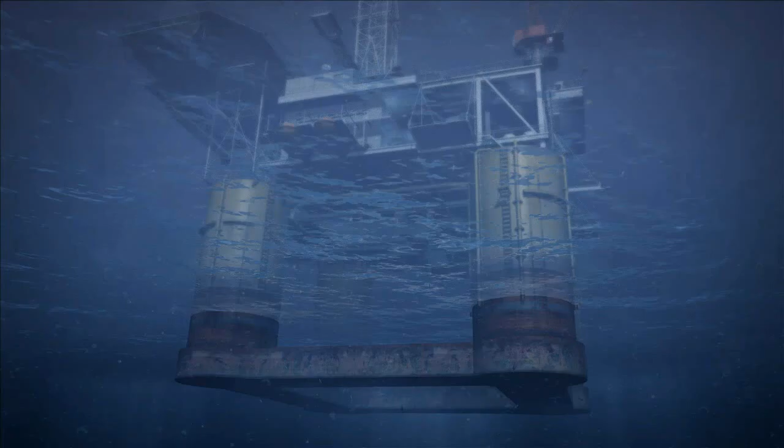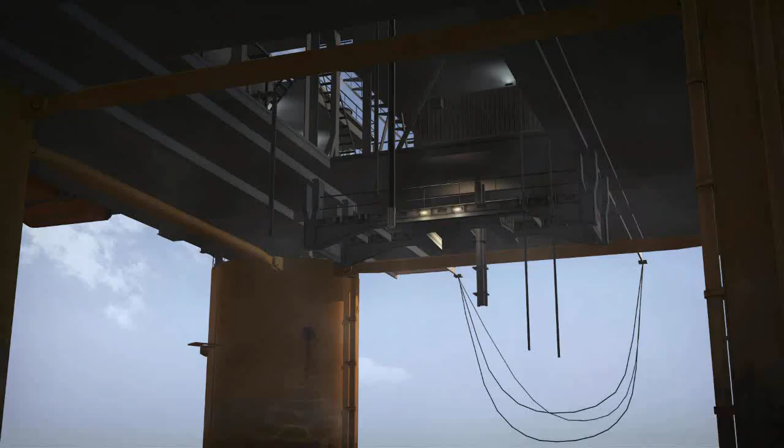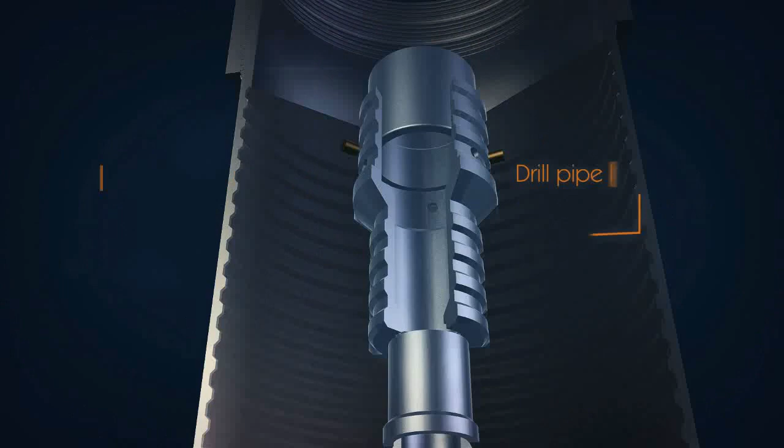At the rig floor, a casing or liner is run with a SeaCure float shoe or float collar, a standard API RP 10F Cat 3C certified double non-return valve, with wiper dart receiver and drill pipe latch-in receiver, complete with backup release shear out feature. The SeaCure assembly, complete with slip joint tool, weight set sub and latch-in adapter, is run into the casing, complete with rupture discs pre-installed.

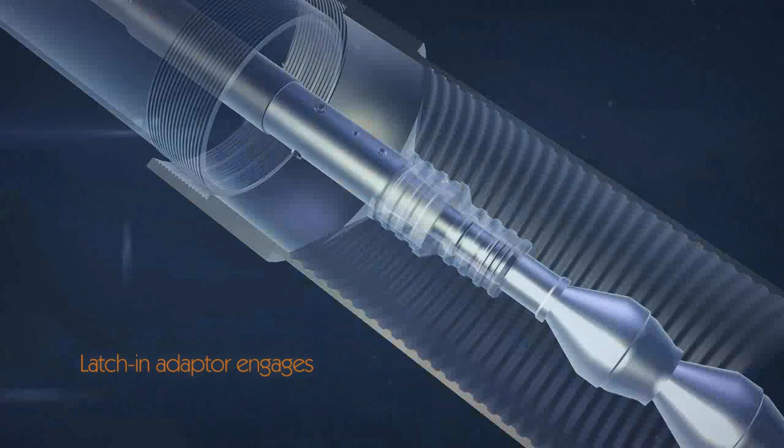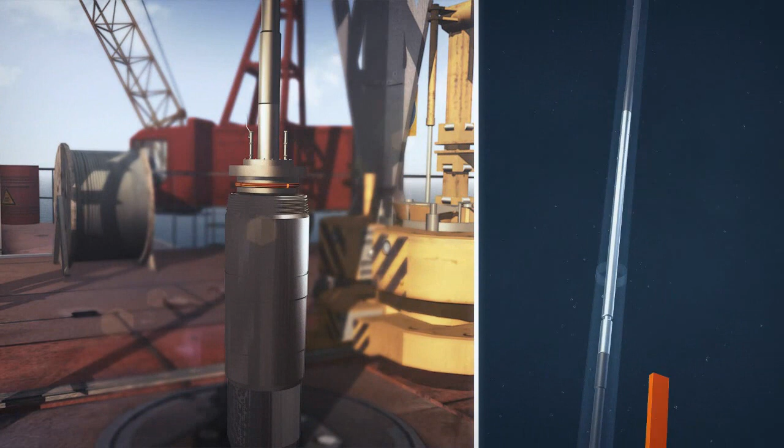The inner string is run until the conventional load-bearing running tool is made up. With the inner string in tension, the SeaCure slip joint tool is in torque-through position. The inner string is lowered until the latch-in adapter is engaged into the receiver, which is confirmed with an overpull. After the casing is top-filled at the rotary table, the running tool is stabbed into the top of the string, allowing the SeaCure slip joint tool to stroke partially closed into the free rotate position, enabling safe engagement of the running tool.

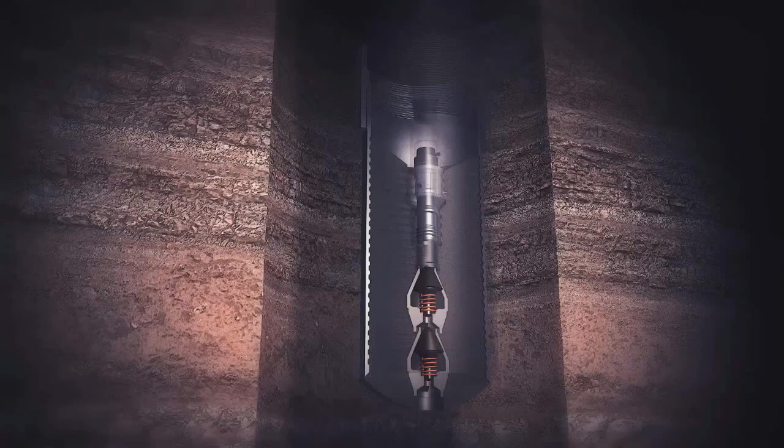Rotary connections are the seals for the cement job now, taking away reliance on large running tool seals. The string is run in hole to cementing depth where the primary cement job is pumped, following which a wiper dart is launched into the string and chased with slurry to guarantee quality cement around the shoe. Alternatively, a SeaCure ball can be dropped.

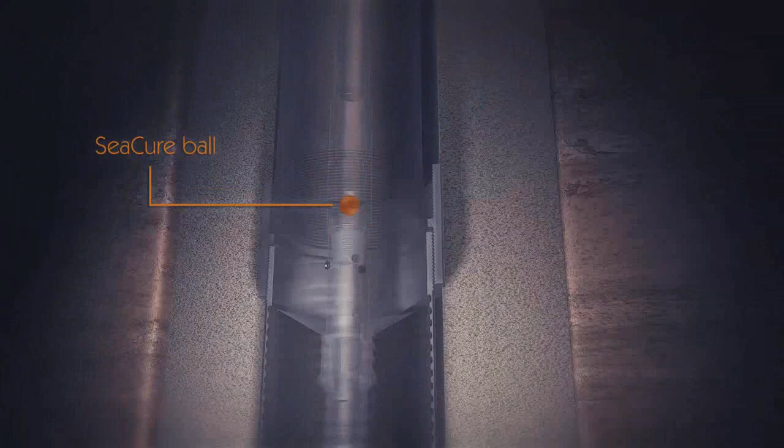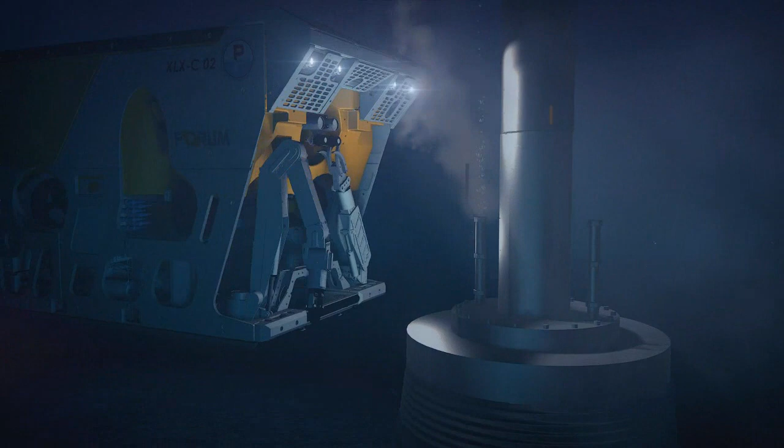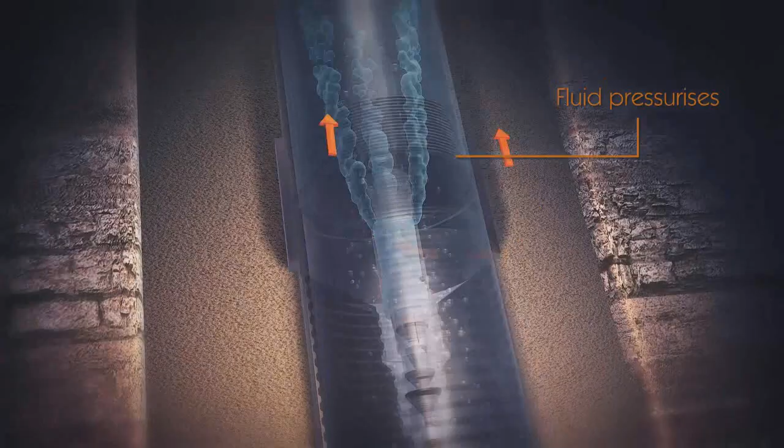Once the wiper dart lands and locks into the receiver or the ball lands in the seat, the burst discs are pressure ruptured, enabling the inner string contents to be circulated out by the running tool ball valve, which can subsequently be closed to allow a casing pressure test to be executed with green cement slurry in the borehole annulus, eliminating risk of microannuli development of pressure testing against set cement.

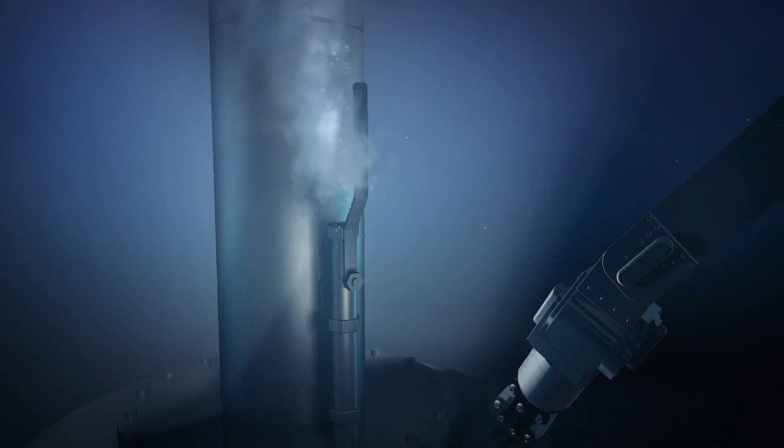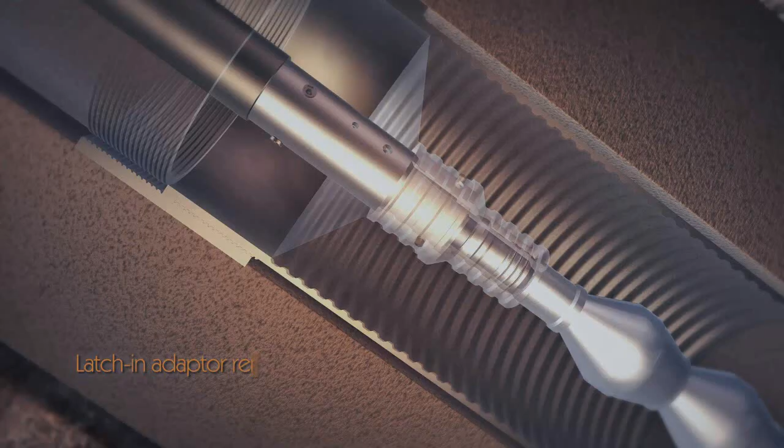Circulation can continue for as long as necessary until the inner string can be recovered. As the SeaCure tool is still in free rotate, the running tool can be safely disengaged before picking up and stroking the SeaCure tool into torque-through position, now able to unlatch from the receiver before pulling out of hole, ready to go drilling straight out of the PDC drillable shoe with no cement plugs or shoe track to damage the BHA or dull the bit, and the casing test already completed.

The system is run with the weight set sub and the SeaCure slip joint tool, as was introduced in the animation, which is the facilitation mechanism that allows this system to be used in any casing or liner string, be it for subsea or otherwise. Now, why might SeaCure be used? Well, fundamentally, by the use of this system, there is no shoe track. And we'll talk in a little more detail as to why that's beneficial on the next slide, where we look at drill out times. But in short, they're pretty quick.

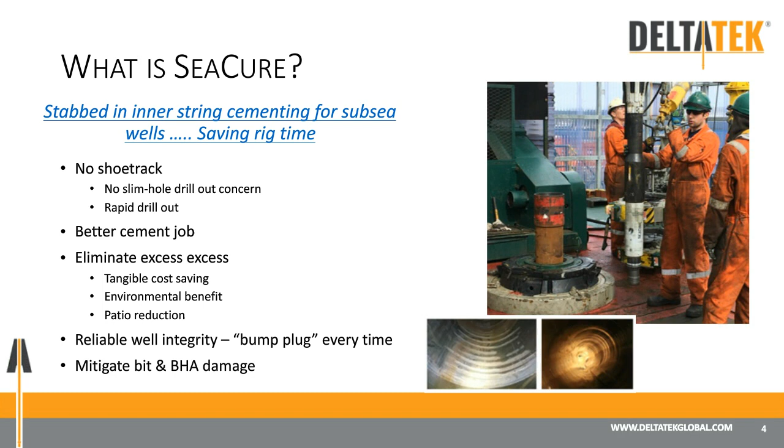So in terms of the drill out opportunities that SeaCure brings to the operation, here I've put a couple of our drill outs across all of our deployments. SeaCure shoes drill out in circa 30 minutes on average. Some of the better ones we've seen as short as 6 minutes. On the right, you can see a 17.5-inch drilling out a 20-inch SeaCure, which was incredibly quick.

I mentioned about the slim hole drill out opportunity, which SeaCure helps reduce risk of cement blocks falling in around the BHA. This is a drill out on the left, a 12.25-inch assembly drilling out a 30-inch, in a little over 30 minutes, which resulted in all of the operational objectives of that well being achieved.

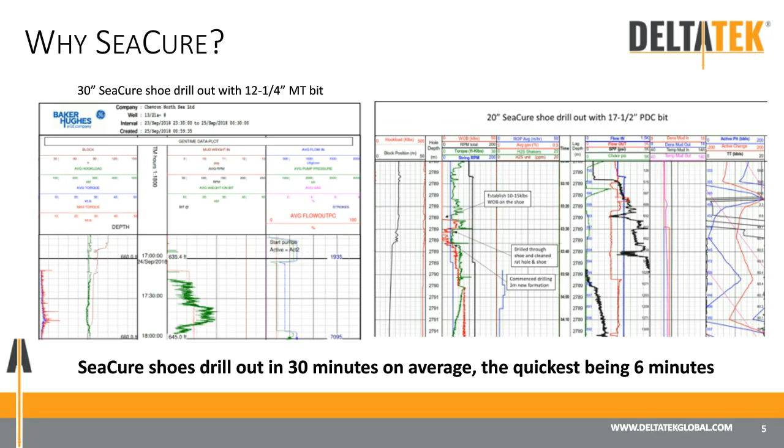Now, quick cure is something which is bolted onto SeaCure. During the animation, you will have seen the moment in the scenario where circulation continued for as long as necessary until the wait on cement period was over. Now, during this period, SeaCure brings the opportunity, the first time this opportunity has presented itself, to have a controlled circulation path up the inside of the pipe at the end of the cement job.

And DeltaTek have been providing a service whereby a heat sweep can be circulated in this controlled circulation path up the inside of the pipe. The warm heat sweep is monitored at the annulus exit of the running tool ball valve so that the exact temperature of the fluid on the inside of the pipe can be measured. And therefore, it can be very simply calculated as to what the temperature transfer through the pipe into the cement sheath in the annulus experiences thanks to the heat sweep.

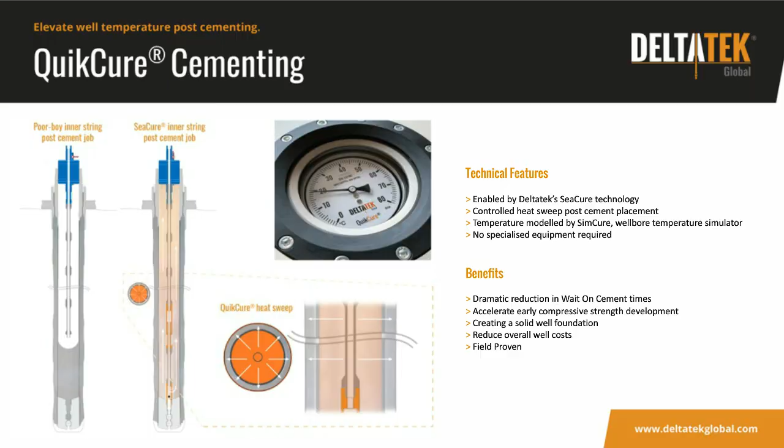How is quick cure done? Well, very simply, seawater can be circulated through an orifice plate or a shear gun line if the rig is equipped with such an incumbent manifold, which most rigs are nowadays. And this heat up of seawater is done in advance of the cement job, such that at the end of the successful primary cement job, the heat sweep is ready to circulate up the inside of the pipe.

The ROV simply monitors the annulus exit fluid temperature through a pre-calibrated subsea temperature gauge, as can be seen on the right of the slide here. And it's incredibly simple technology to minimize any risk of anything going wrong.

We as drillers in this industry understand cement theory, and we all know that the most profound impactor on the set properties of cement is down to the temperature. A rule of thumb for this theory is for every 10F or 4.5 C increase in the slurry curing environment temperature, the time to set halves.

Now, DeltaTek have worked with just about all of the incumbent major service providers in the cementing space to validate this and perform this in real field deployed scenarios. And we've experienced that through quick cure, early compressive strength development improves by 500% in 12 hours. Transition times are dramatically reduced, and operators benefit from substantially reduced wait on cement times, hence the title of today's webinar.

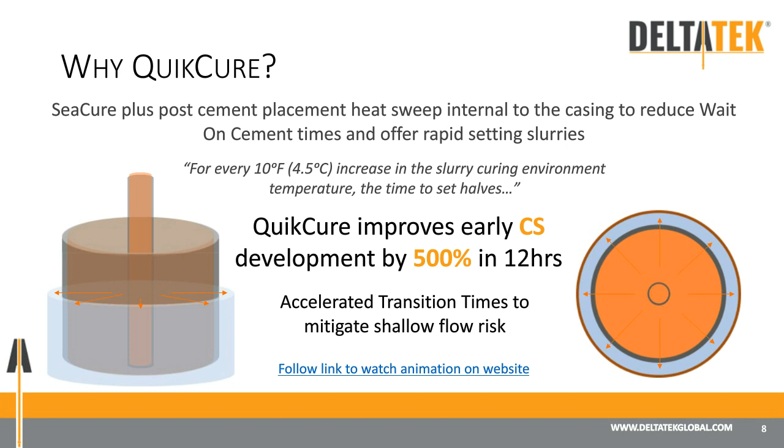And this is where operators benefit from the reduced risk of gas in the slurry migrating, and improvement in the wait on cement times that they have to experience. Now, further to the fact that a stronger structural foundation is delivered,

the experience of some operators by allowing cement to set at ambient temperature is such that not always do the lab results give the exact set times that are experienced in the operation. And this is down to the capabilities of the lab executing the UCS developments.

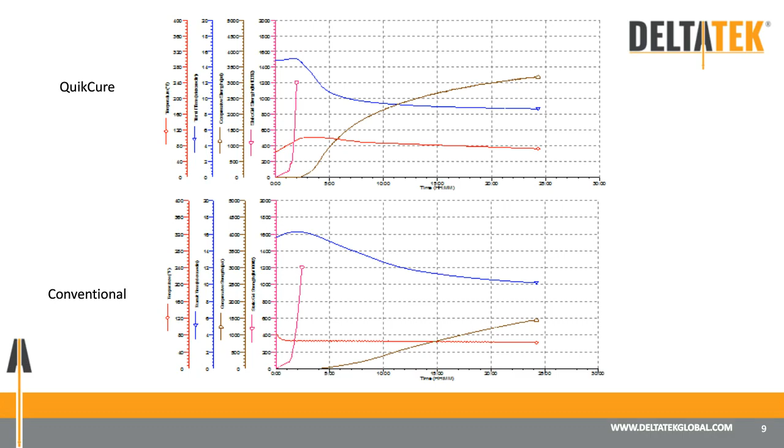Now, sometimes we experience questions from operators of, is the cement adversely affected by the introduction of the heat sweep? And importantly, the introduction of the heat sweep is one not of substantial temperature. DeltaTek recommends starting the heat sweep at surface at around about 65 degrees centigrade. So around about the same temperature as a cup of warm coffee. We're not recommending boiling the cement or exposing it to anything higher than it would normally be exposed to when it's used deeper in the wellbore.

But categorically, the proof in the pudding that this cement has not been adversely affected is the recovery of a core cure cement sample. This cement sample is recovered from the bottom of the inner string underneath where the DeltaTek SeaCure ball lands in the latching adapter and offers a 14-inch cement sample to be recovered back to surface. Now, this cement sample is the sample which is subject to the highest heat of the heat sweep. Therefore, it gives that confidence that the cement is of paramount integral compressive strength and has not been adversely affected.

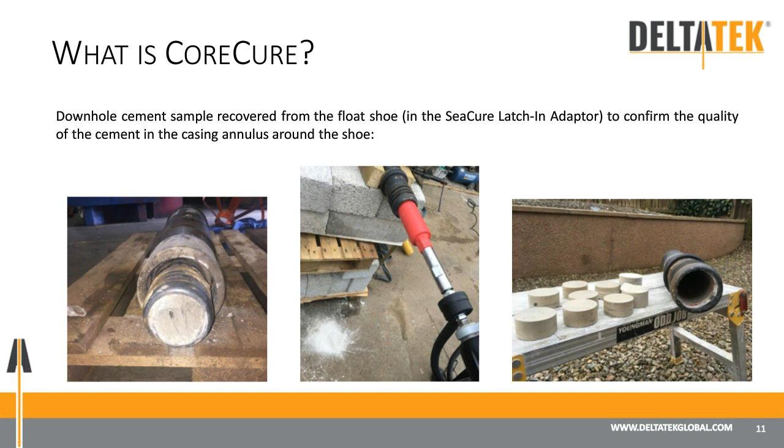DeltaTek's Cure operational envelope is growing. We're at 16 deployments now, 0 NPT attributed to the system, and the envelope has been greatly expanded through substantial deep water deployments in the Eastern Mediterranean, where SeaCure was deployed for 20-inch surface casing strings over a kilometre long in nearly 1,800 metres of water with substantial 3,500 barrel cement jobs.

The majority of DeltaTek's Cure deployments are now across conductor strings and somewhat shallower 20-inch surface casing strings, but the envelope is well stretched now, and we're confident that we're able to bring the large majority of deployments within this envelope. However, the system is incredibly robust, as has been shown through the deployments so far.

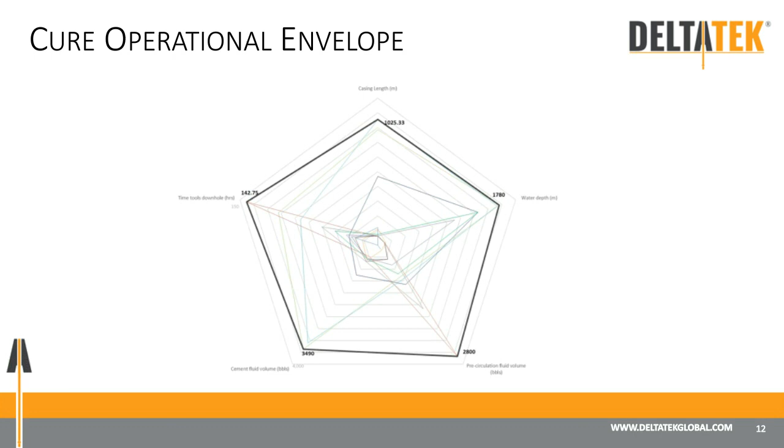And what I want to focus on for the last few minutes is the in-depth analysis of the case studies of one of our early adopter operators, Siccar Point Energy, who alongside Chevron were the first users of the SeaCure technology. And the first deployment which we ran with Siccar Point was on their Blackrock exploration well west of Shetland in the deep water in Q1 of this year, whereby DeltaTek were awarded the 30-inch conductor cement job.

The deployment was a great success, the first recovery of core cure cement samples from underneath the DeltaTek SeaCure ball in the latching adapter. What you can see with the pictures on the right of the case study are some of the captures from the offshore deployment. In the top, following the rupture of the rupture disc and the successful internal circulation to clean the inside of the casing, you can see there the ROV's footage of capturing the fluid effluent out of the ball valve.

In the middle picture, you can see the SeaCure BHA entering the low-pressure wellhead housing suspended on the clamp in the rotary table, and at the bottom you can see the core cure cement samples recovered at the end of the successful job.

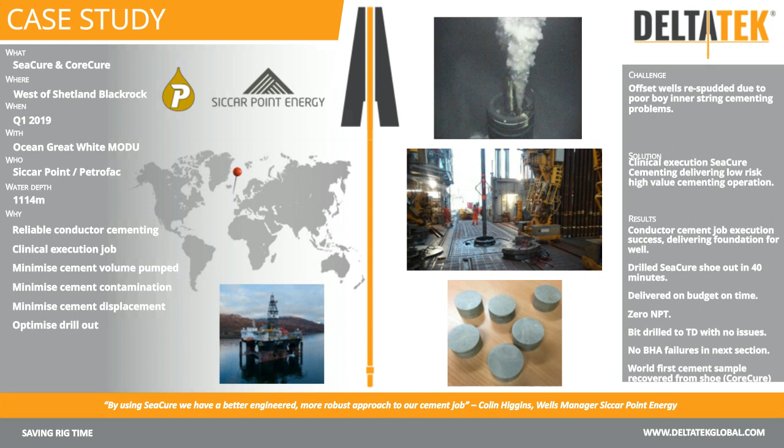Now, the success of the system in this 30-inch deployment, coupled with the problems that were faced during the 20-inch deployment of the use of SSR plugs in the non-bump, led the operator to select SeaCure for both the 30-inch and the 20-inch in their next operation of the campaign that year.

DeltaTek were very privileged to have been reselected, as a lot of the customers do. In fact, just about all customers have reused SeaCure following the original deployment. And this is a fantastic example of that reselection. Once again, the 30-inch conductor cement job was executed flawlessly, and the reduction in planned cement job meant that there was an opportunity to cycle some of that into the subsequent, saving on wellhead fatigue as well as tangible cost.

The 20-inch was an interesting opportunity to realize one of the benefits of SeaCure that wasn't originally obvious. This might be obvious to traditional inner string, poor boy inner string cementing, but not necessarily to those selecting SSR plugs in this scenario. A not abnormal problem was recognized during the cement job, whereby an actuator valve in the bulk delivery system on board the rig wasn't working as per normal functionality, in that different bulk silos were delivering at the same time to the mix hopper. Obviously, this was not an acceptable way of continuing cement jobs, so the operator selected to shut the operation down temporarily whilst this bulk delivery actuator was replaced.